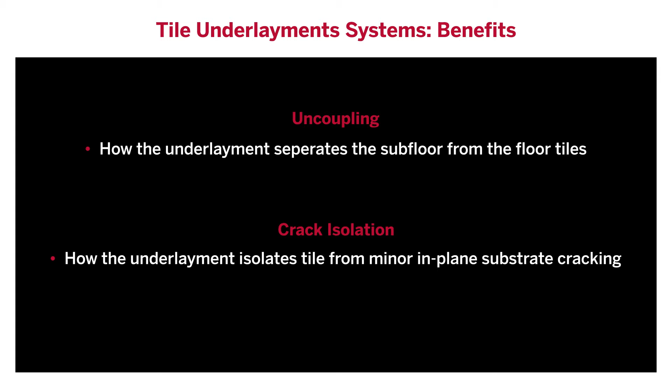Tile underlayments are membrane systems installed on top of subfloor and beneath floor tiles, and they are usually characterized by two features: uncoupling and crack isolation. Uncoupling refers to how the underlayment separates the subfloor from the floor tiles. Crack isolation refers to how the underlayment isolates tile from minor in-plane substrate cracking, and it's often used to emphasize that a product has undergone and passed testing part of the ANSI A118.12 standard.

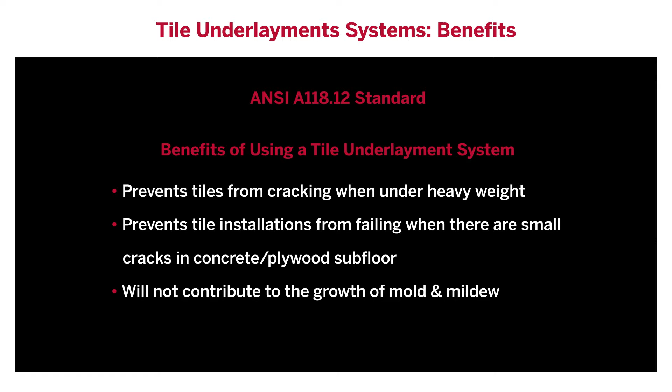ANSI A118.12 is the American National Standard Specification for crack isolation membranes. An underlayment that is compliant to ANSI A118.12 will carry all the benefits listed here. A major test part of the ANSI A118.12 standard is the Robinson floor test.

The Robinson floor test is a method for simulating typical residential and commercial floor traffic, and its purpose is to evaluate and predict how the surface of a tile floor will perform when it's subjected to the continuous movement of different material types that are weighted down. The test involves a specialized testing machine called a Robinson floor tester, which is a carriage with 3 wheels on the bottom and holders on top to carry weighted plates.

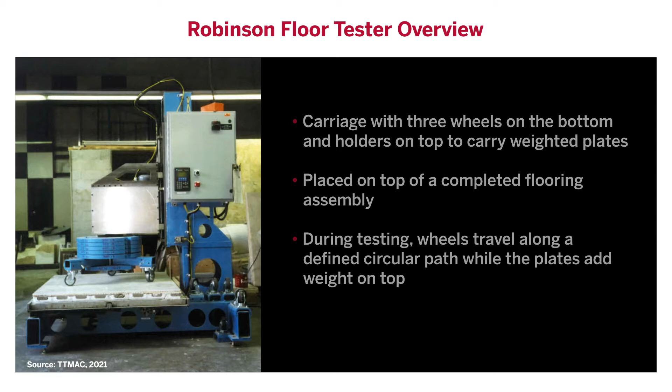The tester is placed on top of a completed flooring assembly, which includes a subfloor of either concrete or plywood, an underlayment layer, and a layer of tile and grout. During testing, the wheels on the base of the tester travel along a defined circular path on top of the tile surface, while the plates add weight on top. Here we are showing a modern redesign of a Robinson floor tester known as the TTMAC Universal Floor Tester.

The floor tester completes a set number of revolutions and only stops when a set number of failures are observed or 14 test cycles are completed. Failures include things like chipped tile, cracked grout joints, and so on. As you can see from the chart here, there are a total of 14 test cycles in a Robinson floor test, and each cycle has specific wheel material and weight value associated with it. The test begins with softer wheels and lighter weights placed on top, and it ends with harder wheels and heavier weights placed on top.

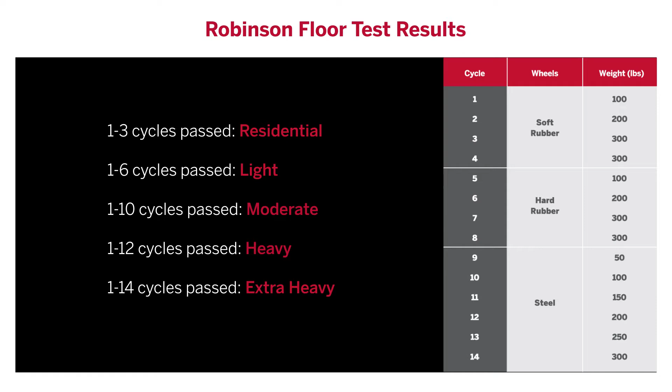Now we have a general understanding of what underlayments do and the importance of their use beneath tile or stone. Let's look at one of our underlayment products, Prova-Flex. Prova-Flex is our uncoupling and crack isolation membrane that is specifically designed to prevent tile installations from failing when there are small cracks in concrete subfloor or small lateral movements caused by expansion and contraction in plywood.

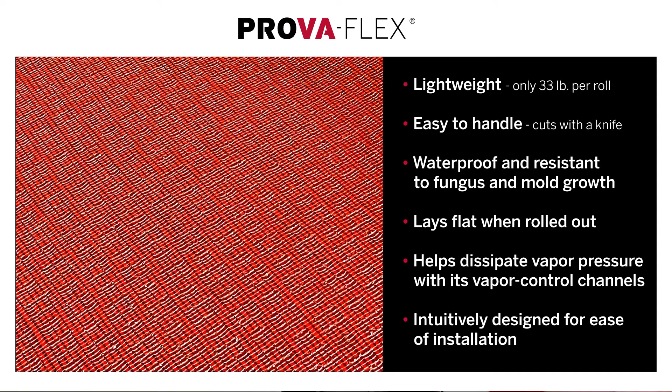There are so many benefits of using Prova-Flex. It's lightweight, so it's easy to carry around for installations. The polypropylene materials are inherently waterproof, and the unique vapor management system allows vapor to dissipate through channels beneath the underlayment. If you use it on a concrete subfloor and you have some moisture to deal with, which is often the case with concrete, it will allow vapor to escape through channels found under the system.

Apart from the vapor channels, what's also unique about the design of Prova-Flex is that it has a mesh on top. It not only lets you key in mortar in a single pass, but also acts like rebar to make the product stronger. And on the bottom of the underlayment is a 1-ply, non-woven fleece. That's what gives it its shear stress control. If your plywood or concrete cracks, which sometimes happens when substrates expand and contract, the fleece won't tear apart because it's all in one piece. It stays together and only shears at the crack location.

As is highlighted here, when Prova-Flex was installed over a concrete subfloor, it passed all cycles of the Robinson floor test. This means it meets the extra heavy-duty designation, allowing it to be used in areas where high impact is expected: food plants, dairies, breweries, kitchens, and more.

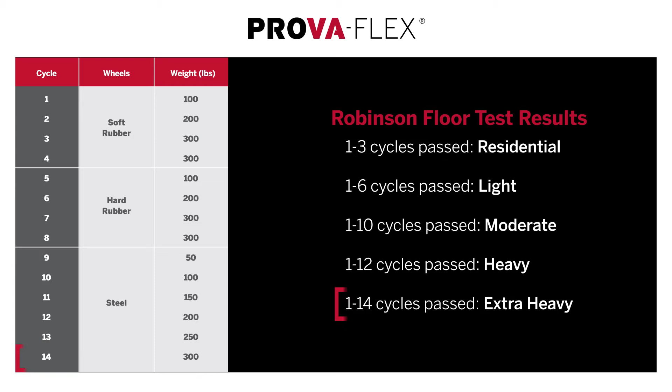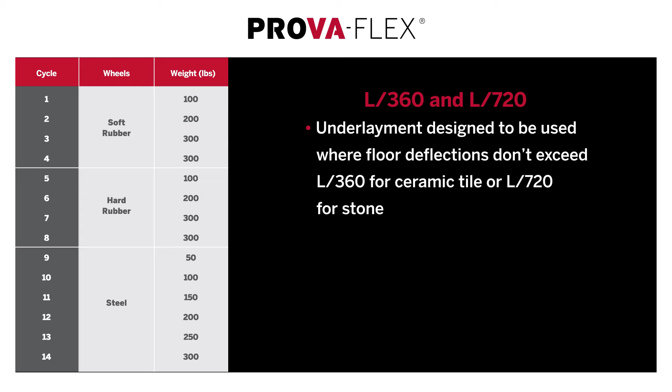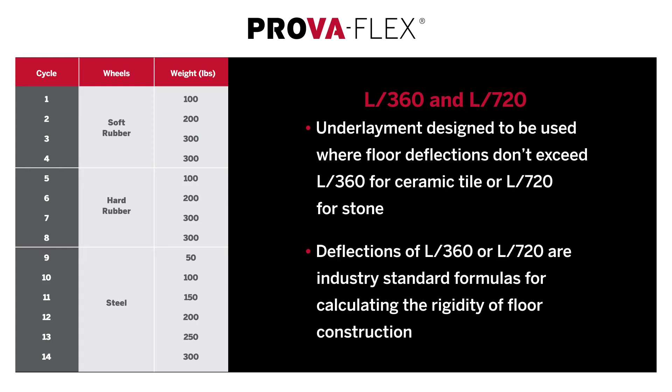Another important technical feature of Prova-Flex is that it is designed to be used where floor deflections don't exceed L/360 for ceramic tile or L/720 for stone. Deflections of L/360 or L/720 are industry standard formulas for calculating the rigidity of a floor construction. The L stands for the span of the floor joist. Dividing the span by 360 or 720 will give you the maximum distance the floor should deflect. Anything beyond this amount of deflection and you would be risking the buckling or failure of the flooring assembly.

Let's look at an example of how to use this formula. If your floor joists are 120 inches and you are installing ceramic tile, you must divide 120 by 360. The result, which is 1/3, will tell you that the floor should not deflect any more than that value, and L/720 is half as much. As long as your floors don't deflect any more than L/360 for ceramic tile or L/720 for stone, you can use Prova-Flex. The underlayment won't fix structural issues in floors that don't already meet these requirements, so make sure you calculate the deflection value of your floor before installing Prova-Flex.

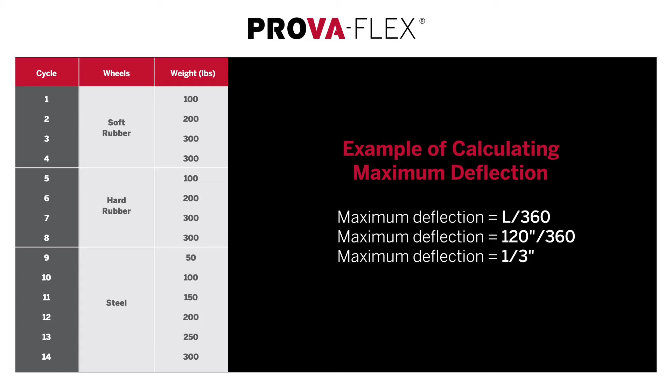So today we're going to put in our Prova-Flex, which is our uncoupling membrane. It is 100% waterproof, but it's not meant for showers. It's meant for putting on a basement floor or a second floor laundry room, or you can put it in your kitchen too, but as far as the waterproofing goes, second floor laundry room or a basement, and you're going to cover it with Prova-Joint. That's going to seal the top edges together so the seam is not going to let any moisture come up through it.

Because with Prova-Flex, it has air channels underneath it that allow moisture to dissipate and come out through. So on a concrete floor, if you have some moisture, it's going to dissipate throughout. For a second floor laundry, if you have a flood, you want to cover the joints so water can't get down between the joints. So when you're on the basement floor, you've got moisture coming through, it wants to get out. If you haven't got Prova-Joint over top, it can come out on every joint, which could be an issue when you're dealing with stone.

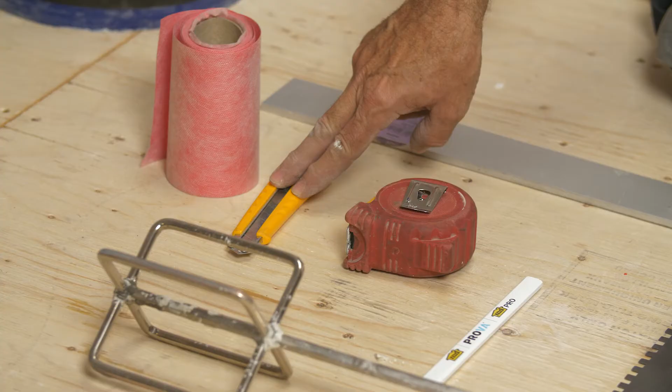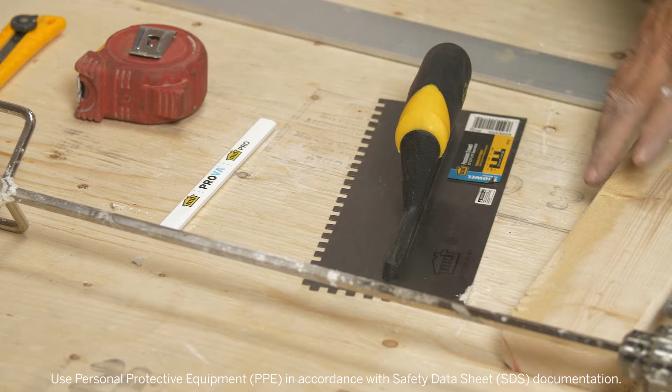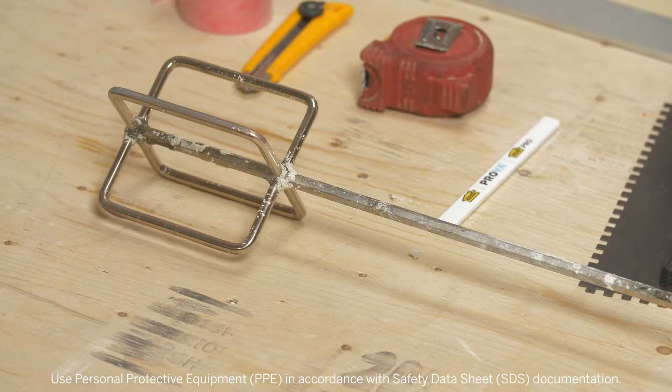All right, so the tools we're going to need here today: we're going to need a sharp knife. Of course, we're going to need a tape measure, a pencil or something to mark with. You need a 1/4 by 1/4 square notch trowel, a block of wood for smoothing it out. You'll see how easy it goes. You could also use a 75 or 100 pound roller. This product's point load is so high, you can use a roller. A mixing paddle with a drill, and you're going to use a straight edge. And of course, polymer modified thin set mortar.

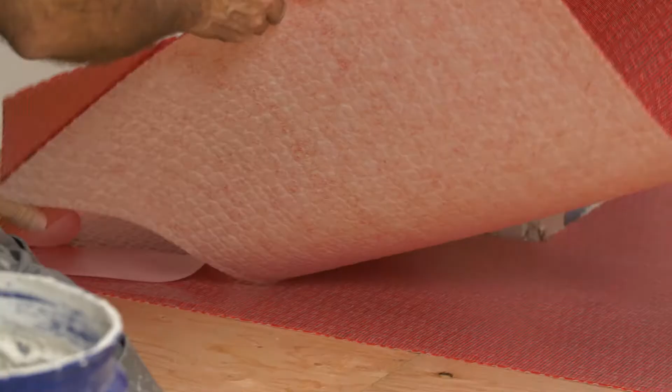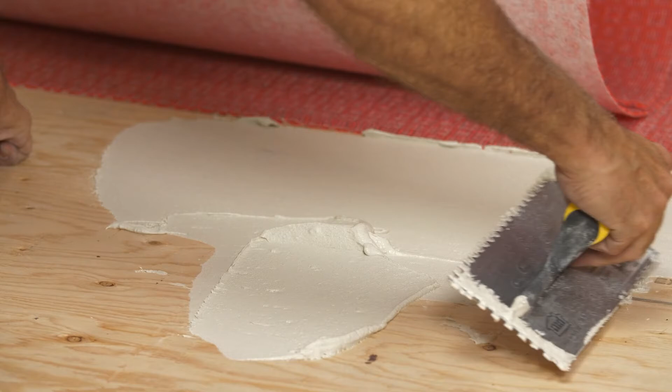So now I already have one piece installed, and if you remember, on our showers I always talk about putting the membrane up over the curb and out onto the plywood floor. We've already got that done. So now I'm going to install the next one here. And again, I've already pre-cut it. Always going to key in your mortar.

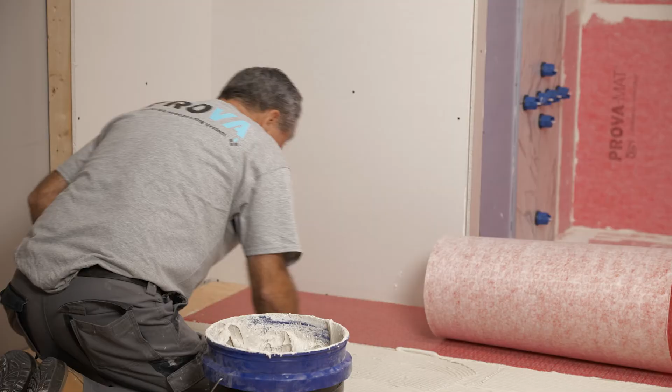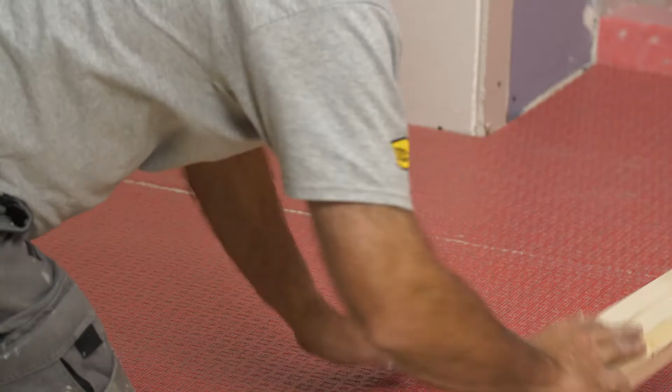So, second floor laundry room or in a basement, you have to put the Prova-Joint on, and you should do that. It's right here. Now, the trowel I've been using for putting down the Prova-Flex is a 1/4 by 1/4. Usually we recommend using a 1/4 by 3/16 inch V-notch with this, but because it's such a small amount, you can get away with a 1/4 by 1/4.

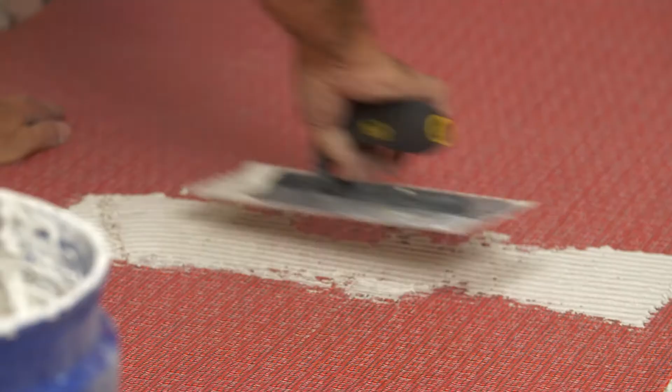Another part about this, you're going to set tile. When it comes to this, when you key it in, it's a one pass. And I'll show you this. So you drag your float over, fills it in, I would say very close to 100%, if not like 98. When you notch it back the other way, it's all ready to go. That's how fast this product fills in with mortar.

Now moving on to our waterproof crack isolation and uncoupling underlayment that can be used as part of our radiant floor heating system, Prova-Flex Heat. Apart from the typical benefits offered by our underlayment systems, Prova-Flex Heat can be used for installing heating cables to warm your floor. The studs that hold the cables are designed so any heating cables can be installed in our product. And the underlayment's interlocking channels create points of contact so the cables will remain locked in place.

Even your sensor cable will stay in place on this one. This level of compatibility is yet another way we try to make the Prova line of products versatile. Plus, we consulted many manufacturers and used their expertise to agree on a cable spacing size that is just right. The result is a cable spacing that provides the most efficient heat distribution across your floors, and one that will ensure your heat sensors always pick up accurate readings.

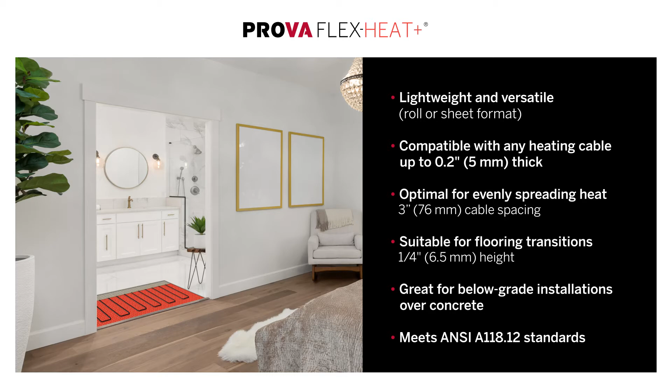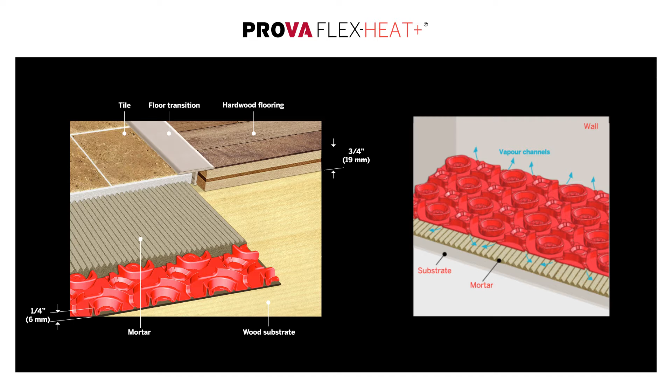Also, if your flooring needs to be level where two flooring types transition, such as transition to hardwood, the height of Prova-Flex Heat is ideal for that. It's especially useful for below-grade installations over concrete because it has vapor channels for dissipating moisture. So now we're going to do Prova-Flex Heat in here because we want to heat this bathroom area.

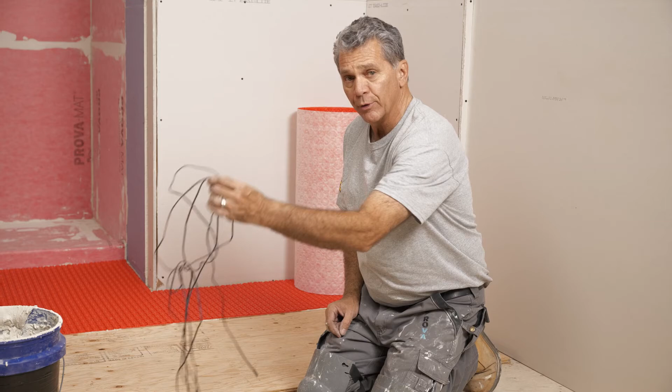Prova-Flex Heat is just like our other membrane Prova-Flex, other than it's thicker, so it's double the height, it's almost 1/4 of an inch. It takes any size wire out there. It even takes the sensor wire and holds it firm for you, which means a lot. Takes any size wire up to 5.4 millimeter. So what I'm going to do now is mortar it down, polymer modified thin set mortar.

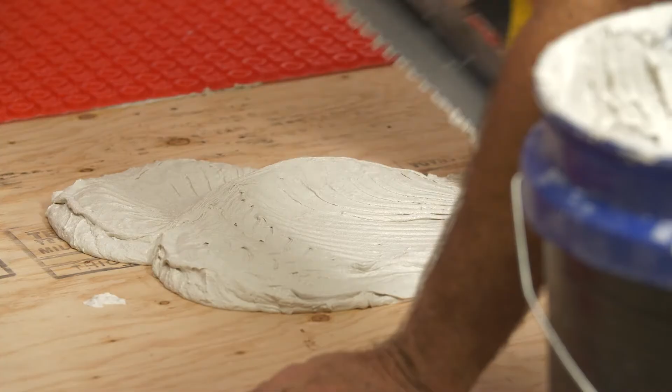The back of our uncoupling membranes have a shear stress control technology. What it allows is the floor can move in plane up to 1/8 of an inch without taking that crack and putting it into your tile. So it stops your tile from cracking. Okay.

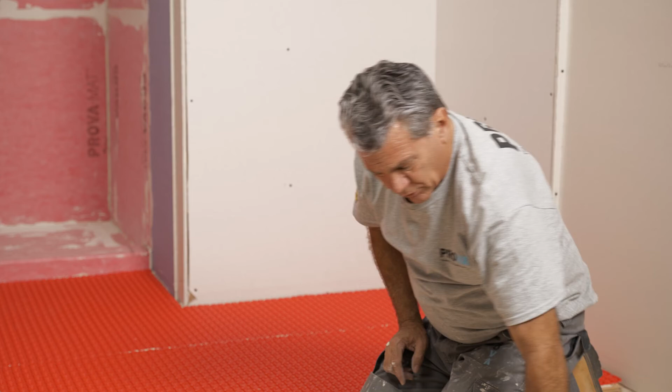So just like our other uncoupling membrane, if you're going to do it in a basement or in a second floor laundry room, you're going to want to cover that joint with Prova Joint. But you don't want to do that until after you've run your wire. If you do the joint first, you can't get your wire through it. So we have optimal 3-inch spacing, which is the best spacing according to wire manufacturers for the heat to transfer sideways. Gives you the most even heat.

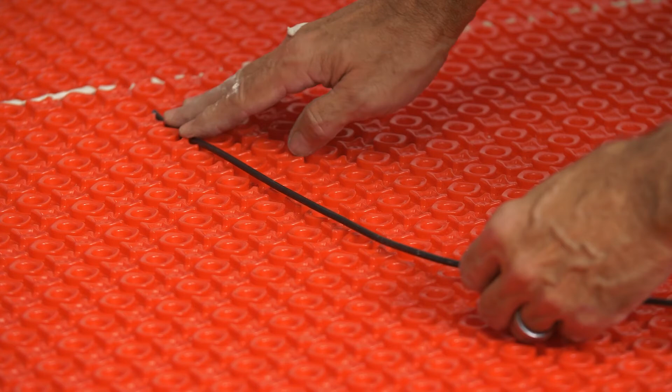So as I mentioned, any size wire, because the way it goes in, you're going to see it here, it kind of weaves itself in. So I think you can see that there because we have 2 points of pressure on one of the studs and 1 point on the other one. So that's putting pressure here and here. That's why the wire goes in like that, and that's why we can do any size wire. We don't care. Up to 5.4 millimeter.

So you just run that through. You could go all the way in the shower. You can come along here, go this way, come back, whatever you have to make it work. So I mentioned the sensor wire. This is tiny. It will fit in here. Now the sensor wire, you've got to have the sensor in the center between 2 wires. You can't have this too close to that. You can't have it touching it. So you can put it right back in there like that. Bring it out of there.

Then you take that sensor wire back to your thermostat, which is going to control the heat at whatever temperature you want it at. So that's why it's a great mat, because it takes any size wire. It holds a sensor wire, it holds a big wire, and anything in between. So we're going to finish this off. We'll have it all done.

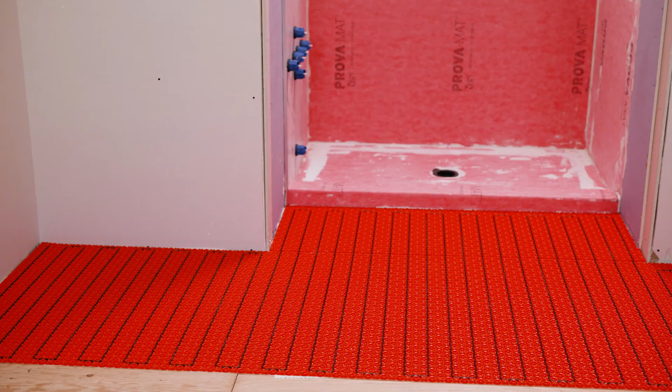That covers it for our webinar on Prova underlayments. To recap, we discussed all the benefits of our underlayment products, Prova-Flex and Prova-Flex Heat. We explained and detailed their technical properties and supporting test results, and we went over how easy they are to install, whether they are being used to dissipate vapor or install heated flooring.